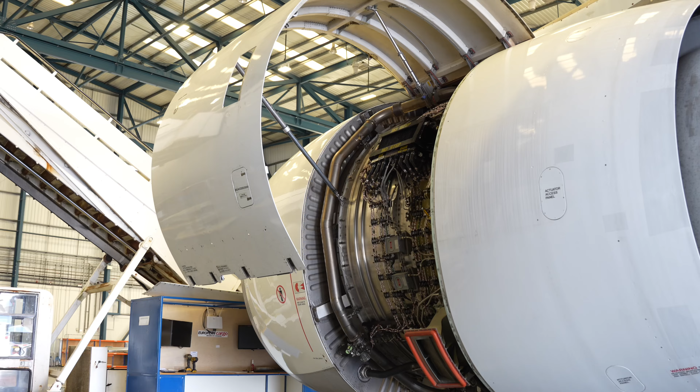We are Gamma Aviation. As a company, we maintain and facilitate air ambulances in Scotland and Wales, corporate flights out from our Farnborough base, and then we also have maintenance engineering here in Bournemouth.

My name is Amanda. I'm a licensed engineer, which means that I can fix aircraft and then sign them off to fly at the end of that process.

I like to be able to see how things connect mechanically. And if something's not working, I like to figure out how. I like to be able to fix that. It's really satisfying, the end result, when you actually fix something. It's challenging, and that's what I love about it.

It's a lot easier, I think, if you can come in through an apprenticeship and have a bit of help and guidance with that learning, especially with a job like this, which is so hand skills driven.

I'm Andy, I'm 23. Hi, I'm Brandon, I'm 21. Here at Gamma, we fix and maintain corporate jets as well as air ambulances that deal with our customers and patients all across the south coast.

I think a lot of people think that aviation is just private jets or airlines, but it's so much more than that. There's so much more that you can do.

So this one behind me, this is an air ambulance. They can fit incubators to transport tiny babies who need to be transported to hospital. You see the people, the nurses and the doctors and the paramedics doing their job on these, and it just gives you that feeling of you're doing something that really matters.

We basically take and maintain their aircraft, which they then send to Jersey and Guernsey to pick up very sick people, knowing that they have an aircraft that's safe to fly back and forth. It feels good to help people out.

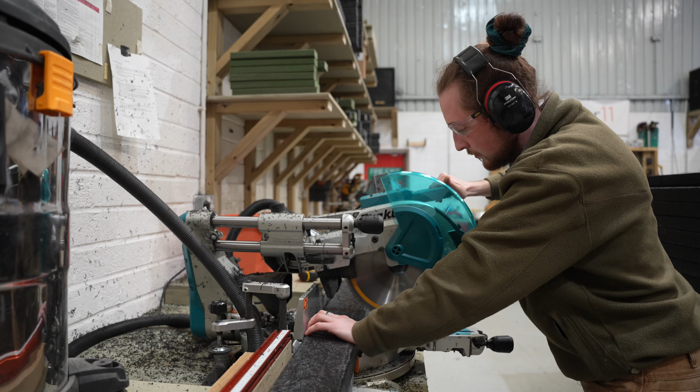So, hi guys, we're here at Circular 11 on their beautifully repurposed furniture. Let me quickly introduce you to Connor. Connor's the owner and one of the founders of Circular 11.

So, as a start-up business, tell me a little bit about your journey. Yeah, well, we started 5 years ago now, not in this particular workshop, but we actually started in the back of an old Arctic lorry. We had very little money, and we just had an idea.

And we never really thought it would become what it has become today, but through lots of trial and error and lots of hard work, this is sort of where we are today, producing at some larger volumes.

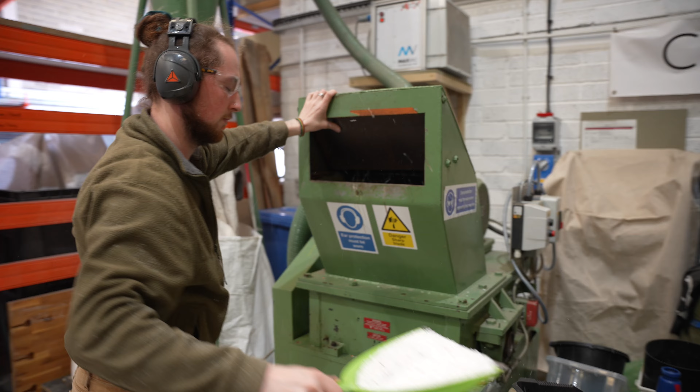We really wanted to build a company that is impact first and that creates a difference. Now the major problem with plastic is, of course, that a large volume of it isn't recycled. And so over the last 4 years, we've created technology that allows us to do just that and take all of the waste streams that are going to incineration or landfill and create them into new products that are designed to last a lifetime.

Milk bottles, plant pots, tubs, trays, buckets, crisp packets, coffee pouches, all sorts of things. So we're able to recycle not only rigid plastics, but flexibles, even things like the pallet wraps behind you. We can recycle all of that, blend it all together and create our plastic lumber.

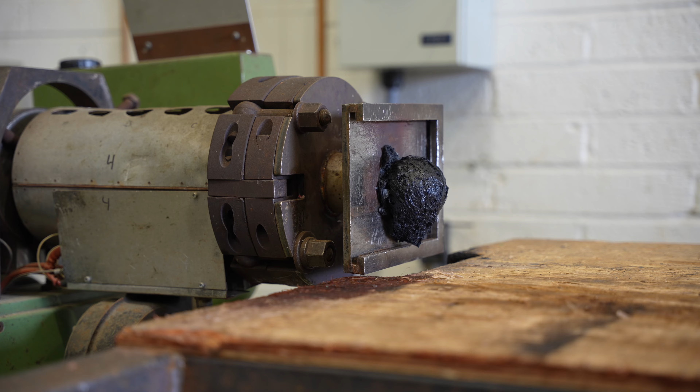So I think that apprenticeships are really important and such a great way to start your career and pick up new skills. I myself started my journey through an apprenticeship in carpentry and joinery.

I went up through the ranks over the years, tried different things. It was truly a unique opportunity to get my hands dirty. I was earning whilst I was learning, which was really important for me too. I was learning so much more than I could in the classroom because it's real world experience and it takes you out the boundaries of a textbook.

And so this is something we offer even here at Circular 11. Skills can be learnt, but having your head in the right place and turning up to work with the right attitude is more important than anything else.

My name's Daniela and I'm the sales engineer at Motion Control Products. Motion Control Products is a company that specialises in motors, actuators, drives and electrical components. We supply a range of different OEMs. We're in various different industries like automotive, medical, industrial, warehouse automation. So basically anything that moves, we specialise in supplying the components for it.

My name's Kitty Clarkson and I'm a mechatronics engineer here at Motion Control Products. We provide a lot of technical support to our customers. Obviously we sell a large variety of products, so we like to help our customers create full system solutions. I started as an apprentice at a different company and then I moved here to Motion Control Products. I wanted to broaden my horizons, and I like the fact that Motion Control Products sold such a wide variety of components and parts.

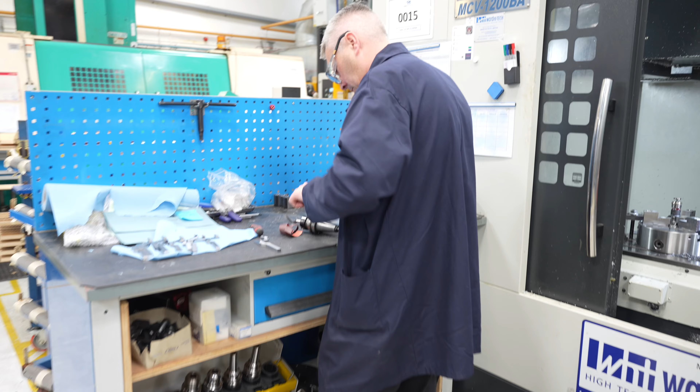Hello, this is Dan from Field International, the Managing Director. Here at Field, we are a global manufacturer of tooling and ground support equipment for the aircraft industry and provide into the defence sector mainly a range of machined and kitted componentry. There are 3 types of apprenticeship we offer: a welder fabricator pathway, a CNC machinist pathway, or an assembly fitter pathway.

Hi, I'm Jamie. Hi, I'm Ollie. We work for Field International. We are the first apprentices in 4 years. I'm a newer apprentice, I've been here for only 3 months now. I'm still in inspection, but I'm heading into assembly soon.

Advice I always give apprentices is when you start with a company, what employers are really looking for is attitude and aptitude. If you start with a company on one pathway, but actually you decide that's not for you and there's another one you would like to take, if you're the right candidate and you're working well and showing that you can provide a future and a route for the business as well as for yourself, any employer, in my opinion, is going to give you that opportunity and allow you to change. So don't let the selection of a pathway be a decision maker at that point.

It's mainly problem solving. Every day there is a new problem. We create parts, we survey, fix, repair, a lot of things that I never would even have thought of. Working in the aerospace sector is exciting. You get to see aeroplanes, you get to see how they work.

Some of our own IP is actually the extraction tool for the A380 undercarriage. So the largest aircraft ever built - we designed and manufactured the original and now the upgraded version of the undercarriage extraction tool. The reality is that anything that we see, do, feel, touch in life is affected by engineering. Engineering has an input to pretty much everything, and I think that's something people don't realise and don't understand.

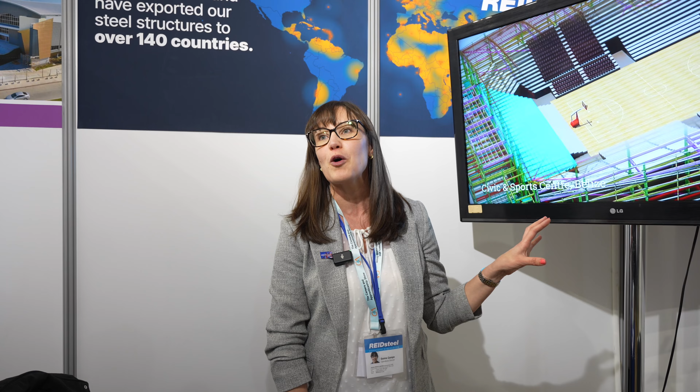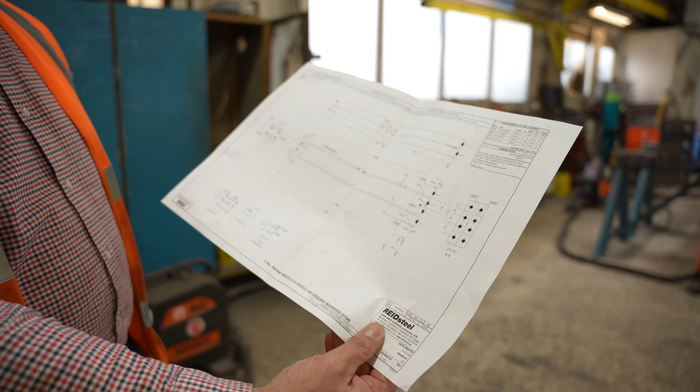It's quite exciting to think about all of the roles that have been a part of that. Designers who have done the concept and all the detailed calculations, thinking about where in the world the structure's going to be and whether there are any environmental matters to consider. All the detailed mathematical calculations for the loads and the connections. Detailers who do the more detailed designs, all of the support functions, our project managers and our estimators, and then our fabricator welders in the factory who are cutting and drilling and welding these items together.

So there's a good opportunity to come in and learn steel detailing, cladding detailing and how it all fits together.

So now we've met some real-life Dorset engineers, come with me and meet some more, and you can find out how rewarding engineering can be.

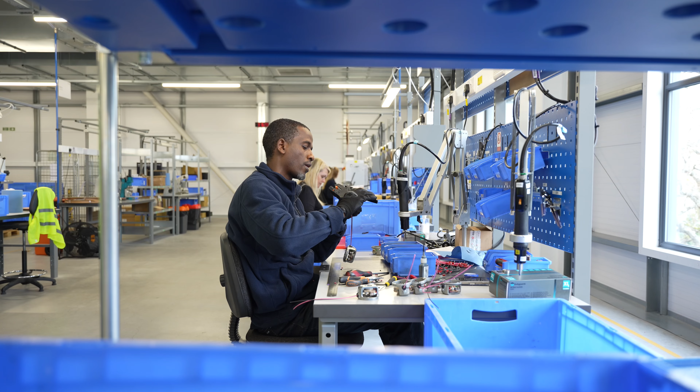Hi, I'm Matt, I'm a production engineer here at Parvalux. Hi, I'm Harry, I'm a digital marketing apprentice at Parvalux. We design, engineer and manufacture electric motors for all kinds of applications like stair lifts, powered wheelchairs and automatic doors.

I myself started as a design engineer, that's what I qualified in. I found it really rewarding, but I wanted to get out there and get a bit more hands-on. So as a production engineer, I'd say I'm quite varied in what I do. It's split quite 50-50 between the design of lines, design of jigs and fixtures to help build the product, but then also out there giving active training, producing documents, photographing.

We've got quality engineers, making sure the product is always tip-top, going through certain checks to make sure that it complies with what the customer's after, and we're happy to send that out the door. We also have applications engineers, so how is the product actually going to be used in application? For instance, if that's a caravan mover, what are the weights involved, what are the speeds, can we actually produce that with what we've got in-house, or do we need to design something new? So there's lots of different avenues of engineering that come together to form the product.

The apprenticeship helps to build your own skills and knowledge about different areas, learning things that otherwise you might not normally learn. You talk about technical things and they're picking it up immediately, or they've seen it in their experience because they've already done a few years of it. It's brilliant because it then saves you time, you can get into things more, and it's advantageous for all.

The biggest step is that first one you take. If you can get there, get your foot in the door, introduce yourself, you stand out from the crowd, you'll be remembered, and you're more likely to get that bit of work experience you're looking for. Make yourself known, make your skills known and what you want to do. Willingness to learn, willingness to bounce back from failures or setbacks is a really big characteristic that Parvalux looks for. Not every day is easy, but as a team we can get through a lot of problems, a lot of challenges together.

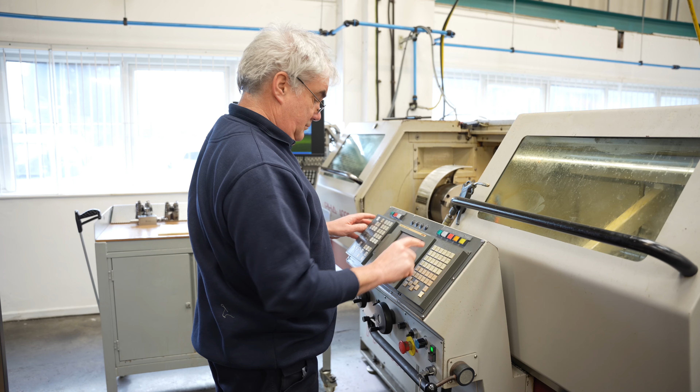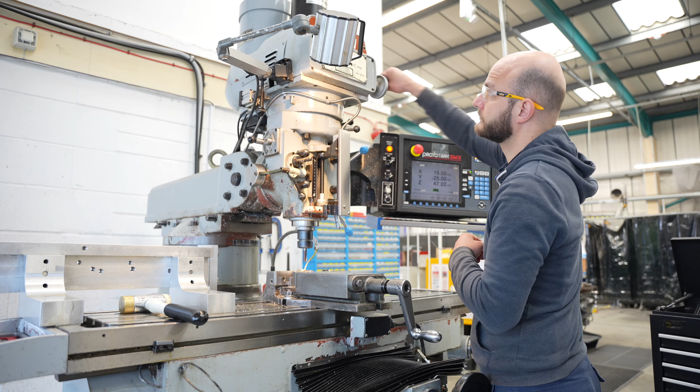I'm Lee, I work for Ishida Europe, I've been here for 18 and a half years now. I've finished my apprenticeship here, gone through the training for various products that we do at the company. I learnt about all the food packing industry, working with all the different materials from tube work, box section, sheet metal.

I've been involved with designing, helping make the products cheaper, more robust, simpler to make, and then a few years ago I became the team leader in fabrication. If you go into any sort of supermarket, you can see products that we've helped package throughout the world, from chicken at Tesco to Walker's crisps. You could have a whole table filled with products that everyone uses in day-to-day life.

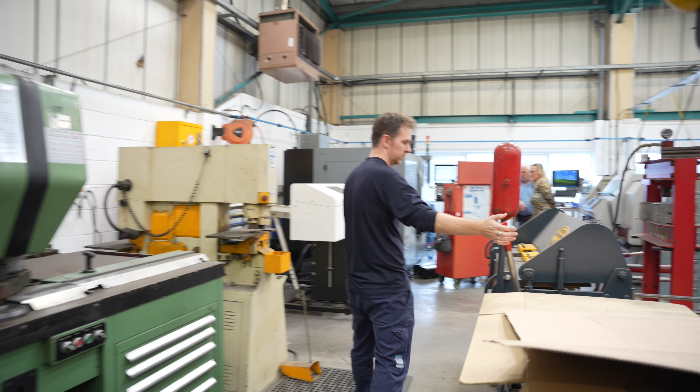Engineering has been a blessing to me because I got to the end of school and really didn't enjoy it. I always liked using my hands, and engineering is all about that. It's about learning hand skills, using your brain, and I think that really helped me transfer from school life to work life. With the apprenticeships we do here, we're not just stuck in one section, because when you come into engineering, you learn a lot of what you need.

Having basic maths does help because you're using a lot of your brain to work out dimensions, equations, but none of it's really needed, especially with an apprenticeship. You can get all the help you need, all the training you need, which helps you throughout life as well.

I'm here with Darren from KDC.

Hi Duncan, we're KDC Projects. We've got 4 different companies: KDC Projects, where I'm operations director, KDC Resource, ATL Europe, and First Shell. Traditionally we do engineering outsourced across all our companies, and we've got around 150 engineers supporting us across the board.

Hi, I'm Caspar. And I'm Ben. We're here on our break right now, having a little game of pool, and we thought we'd talk about our experiences at KDC and how we got started.

I've always been interested in design and machinery. I like cars, I like bikes. Yeah, I kind of fell into it myself. Always liked the creative side of it, coming up with different ideas, and problem solving always kind of excited me.

Using CAD has been the biggest thing here, really. Yeah, CAD being computer-aided design. It's a software that we use day to day. It's where we digitize designs and come up with models so that we can analyze them.

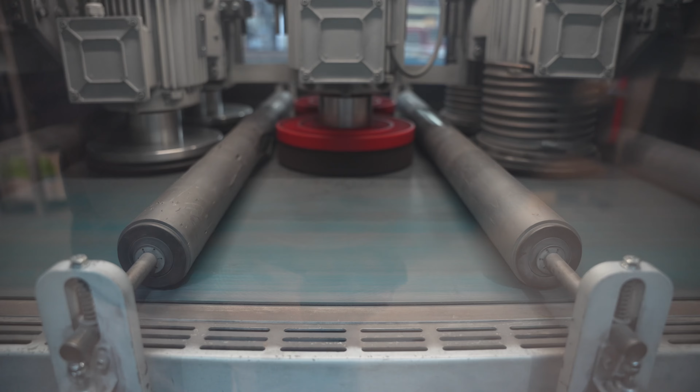My name's Wesley Hamer. I'm one of the directors at WRES Limited. We're a welding fabrication company that works in various fields, so we make anything from radar masts, fuel tanks to go in the marine industry, various items from control units to storage units for the defence sector.

As an apprentice, obviously you're going to start relatively at the bottom, but as time goes on your skills develop. Now I feel like my bosses can ask me to do various jobs, and I can crack on and do most of them now.

Regarding apprenticeships, they're really key for businesses to grow. You tend to find, particularly with us, we're quite a small team, so you can be quite hands-on and deal with different areas of the business. One day you could be folding parts, laser cutting, welding.

Every day is different. Some people are not very academic, but when they come to a workplace, they thrive because they can be more hands-on. They're in an environment that they like, working with their peers that support them.

Some advice I would give anyone looking to take an active role in this sort of environment: find something you enjoy. If you think, I want to give that a go, don't be frightened, give it a go.

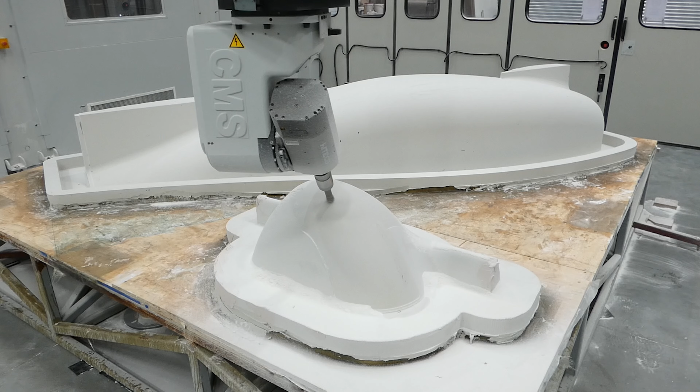My name's Harry Dodge. I'm the Business Development Manager at Norco Composites. Norco Composites are a manufacturer of large, complex composite structures, everything from F1 vehicles all the way to periscopes for submarines. Composites are quite exciting because they're usually much lighter weight than metallic materials, and it improves the opportunities that futuristic ideas can actually become more realistic, either more cost-effective or more innovative.

We work with things like carbon fibre, glass fibres, even Kevlar, and do quite a variety of components for lots of different industries. One of the programs we're working on at the moment is with a company called Vertical Aerospace. They're making electric vertical takeoff and landing flying taxis. We're helping with the prototype program there, and it's a really exciting program looking at making urban travel a lot more accessible.

We are currently making F1 simulators, so really high-end performance simulators that are making the F1 industry quite excited. We work in quite a niche area of engineering, but it's growing rapidly.

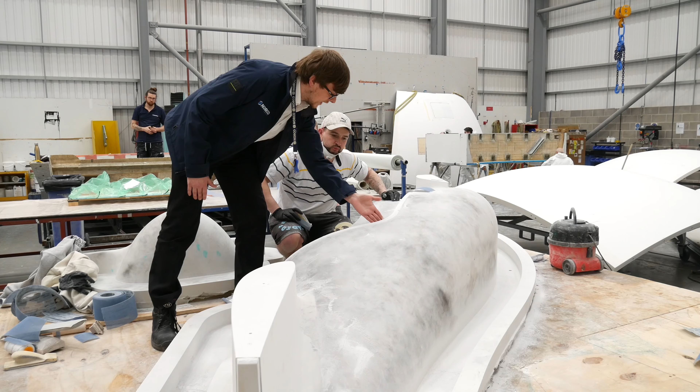What we've recognised is that we have a lot of experience within the team that's able to educate someone as they're coming through. So from entry level to college-age students, we have a training program that works specifically to give young people practical skills and actually learn how to do the production on the shop floor.

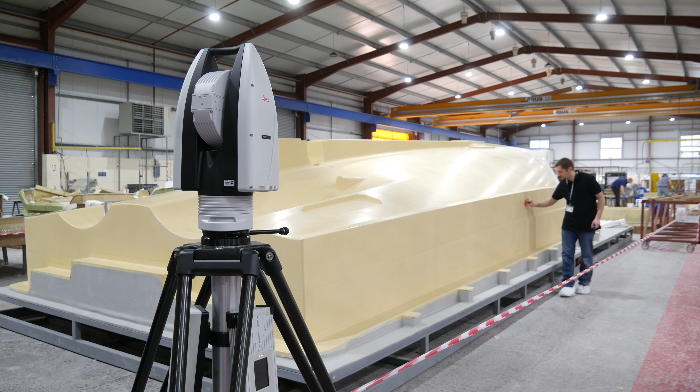From that, they're able to go from wet laminating on traditional leisure marine like super yacht components all the way up to the pre-preg components that we do, which work on things like that flying taxi that I mentioned earlier.

We have had members of the team who have gone from those sorts of programs up into the manufacturing engineering side of the business. So they've transitioned into an engineering role from experience on the shop floor. It's not necessary to have a degree, but having practical experience is really valuable to us.

More and more nowadays, employers are looking at what are your interests and how do you apply yourselves to those. Having something practical and physical that you're working towards is interesting because it shows you can work with your hands and you're practical and you've got that mindset. In engineering, that's really valuable.

In that time I was given some training sheets to work through. They all start at level 0, which is basically knowing nothing, and then slowly as you progress through the sheets you start to level up, so you go from level 0 to level 4.

You've got Bournemouth Airport so close, and there's also other aerospace companies sort of in Yeovil. There are quite a lot of opportunities locally to do a lot for the aerospace sector as well. Yeah, it's quite rich in opportunity, I think.

If you enjoy doing things with your hands and looking at sort of a Formula One car and watching it on the TV, creating something that goes on that car is very, very rewarding, very satisfying. To watch that car go around and say, you know, I had something to do with that. That win is on me.

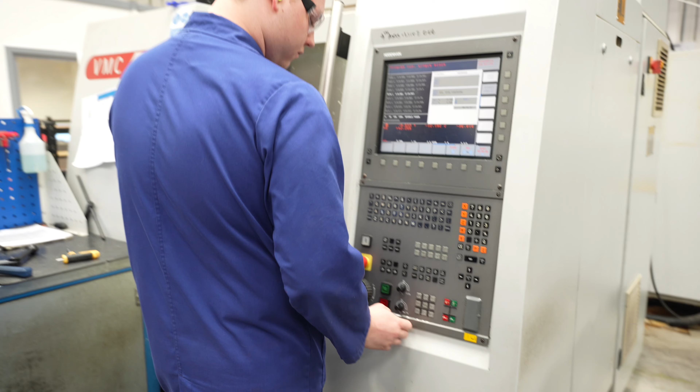I suppose it does sort of give you a pride because you're helping not just yourself, but you're also making the bits to help other people as well, which I suppose in the big overview of engineering, being a part of that to keep advancing medical sectors and all of that and just making it grow and make you feel proud about what you do.

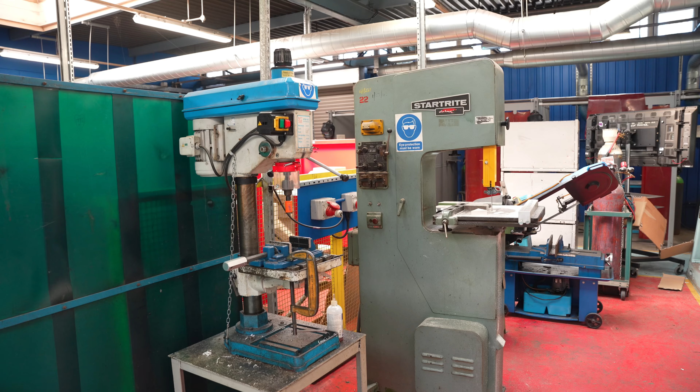Hi there, my name's James Hills and I'm a Director of Learning at Bournemouth and Poole College, and I cover the engineering sectors. I'm here to tell you about how you can get into some of these amazing industries you've seen throughout this video. Here at the college we work with over 150 employers every year, all the way from apprenticeships through to degree level programmes.

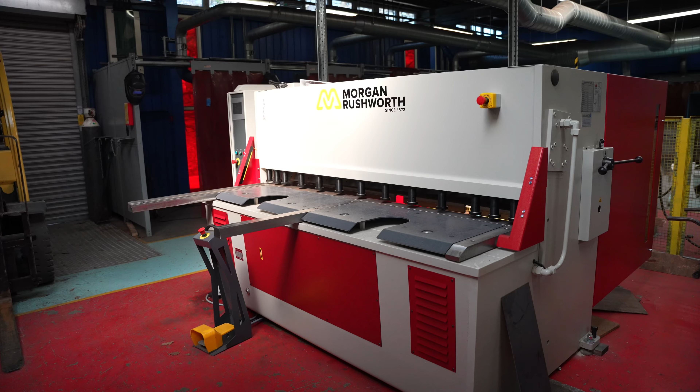We have courses that run from level 1 for those people that are trying to get into the industry and maybe need a little bit more support, all the way through to degree level with Bournemouth University at the heart of our courses. If you want to be in engineering, we can help you no matter your starting point, no matter your age, no matter what you currently do.